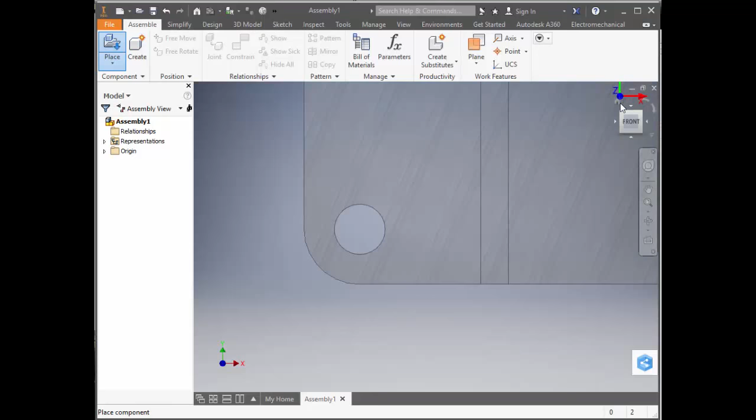Click to place the part. Unfortunately, it just plops in anywhere. Take a minute and constrain it and ground it. I like to turn on the origin planes and mate my first part on those planes to confirm proper orientation.

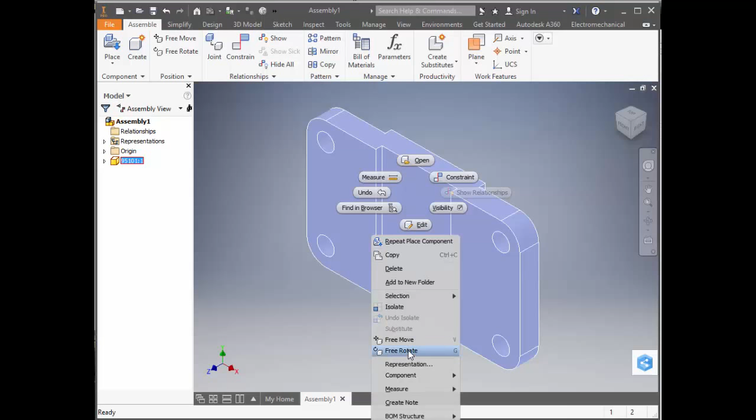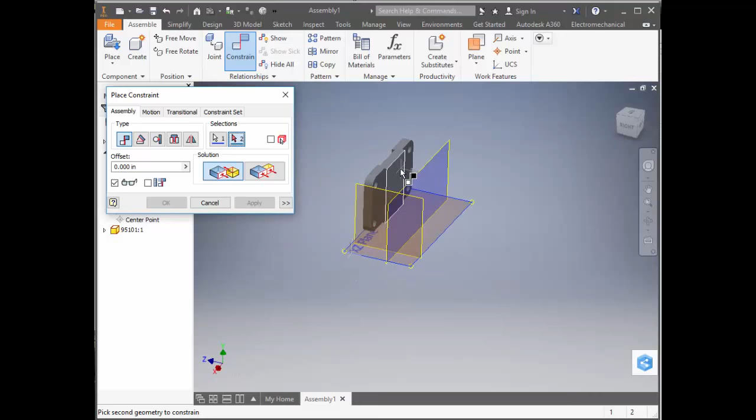Using the constrain tool, I'll select the top plane and the bottom face of the part. Click Apply to accept the mate. I'm using a 3D mouse to rotate the view. You'll have to use the view cube in the upper right corner.

Next, I use the constrain tool with the YZ plane of the assembly and the YZ plane of my first part. Again, click Apply to accept the mate.

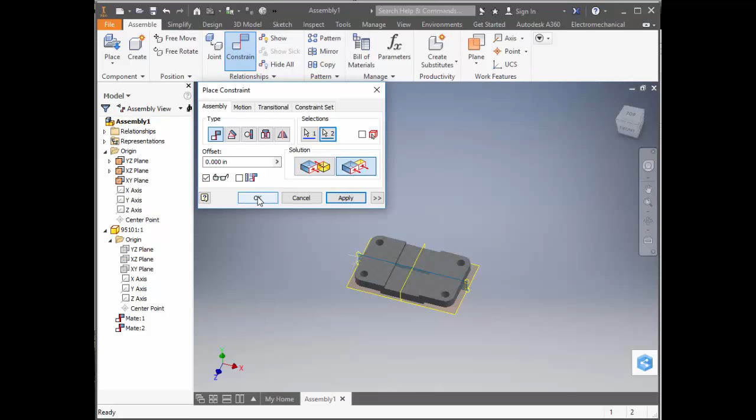To completely nail this part down, I will constrain the XZ plane of the assembly to the XZ plane of the part. Then I'll right mouse click and select Grounded.

The base cannot move at all now and is properly aligned with the world, meaning my front view will really be a front view. This is important.

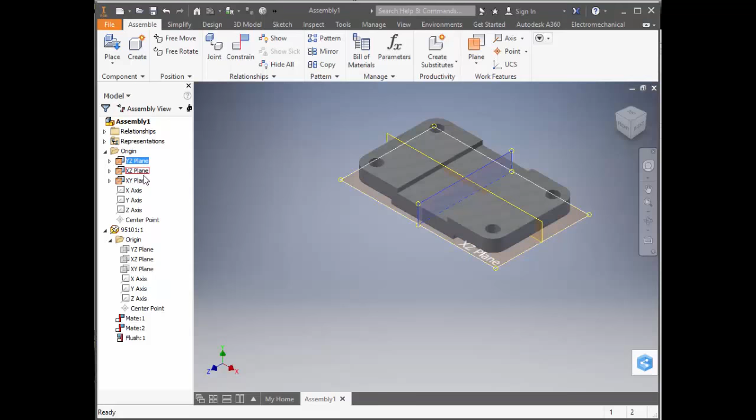Now I can place more parts into the assembly. I will add the wheel and then the end plates.

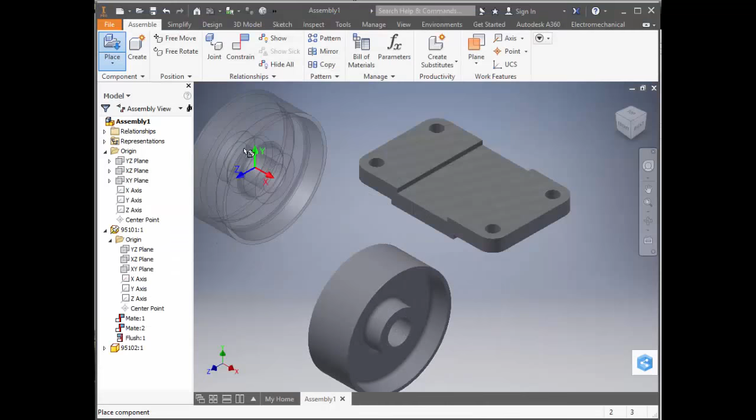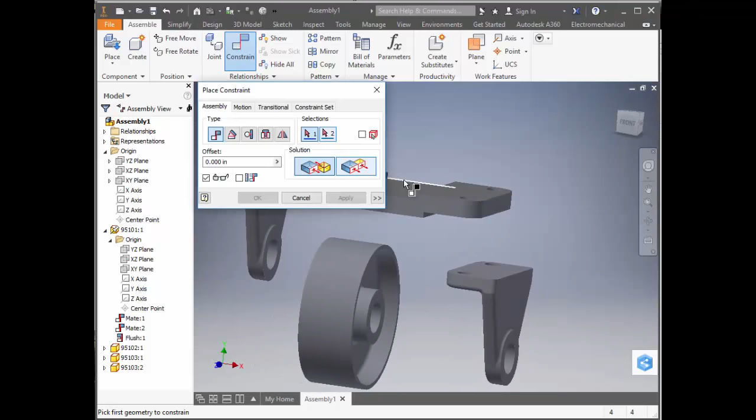Most of the constraints you will use will be face-to-face and axis-to-axis. Face-to-face places the two selected faces together.

Pick on the face of the inside of the holes to get an axis. Pick the axis for both the base and the end parts. Click Apply to accept the mate. Repeat the axis-to-axis constraint on the other hole.

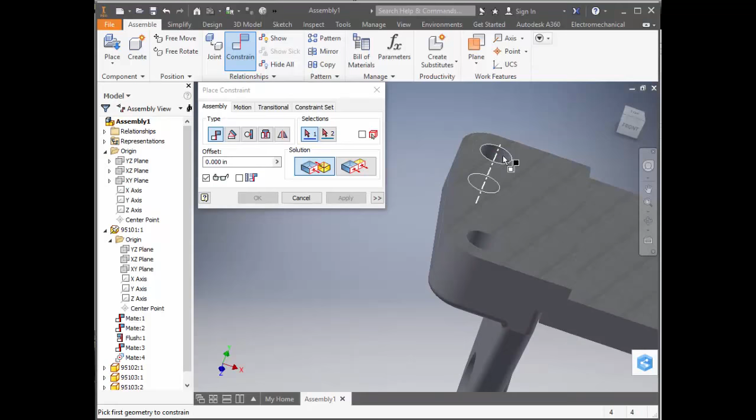Sometimes you will need to rotate the parts to be a little closer to the right direction. Right mouse click on the part and click Free Rotate. Use your mouse to rotate the part to be pretty close to what you want.

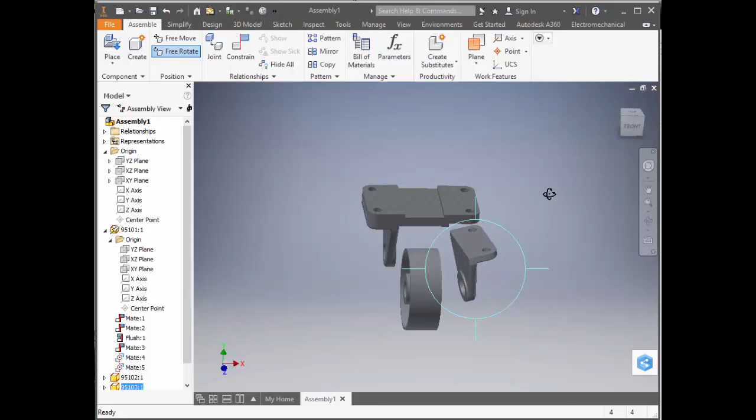Repeat the face-to-face and axis-to-axis mates we used on the other end.

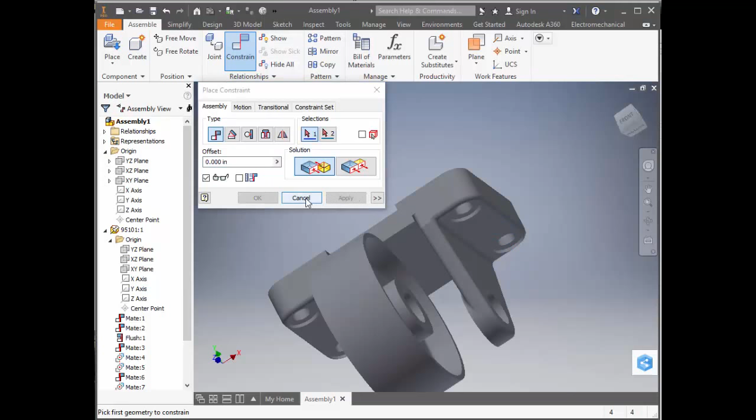Use the axis-to-axis constraint to align the wheel hole with the end plate hole. Note, you only need to do this on one side.

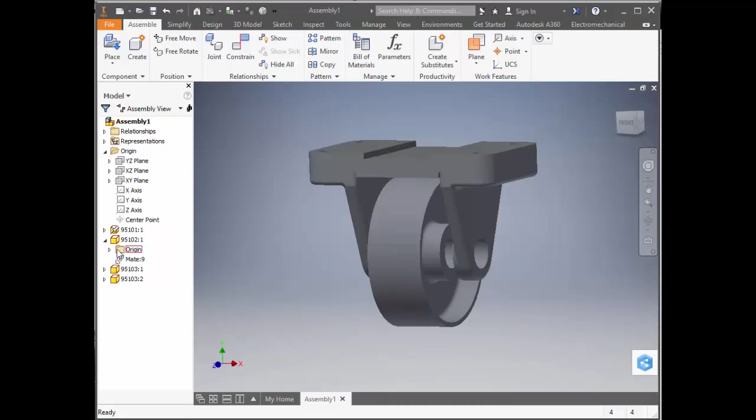There will be some clearance between these parts, so you can do the math and add offset values, but a better approach is to use the planes that already exist in the parts. That is, if you were smart when you made your part.

Add the axle with the place tool.

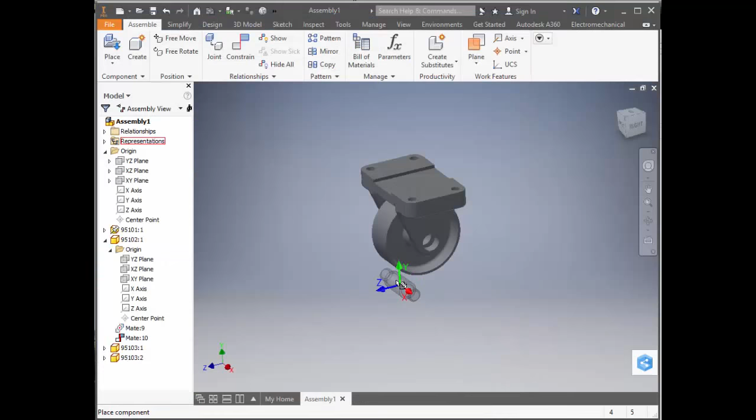Use the same axis-to-axis and plane-to-plane mates we used on the wheel to center the axle between the ends. You will soon realize why I use symmetry extrude and design my parts to keep the principal planes in the center of them.

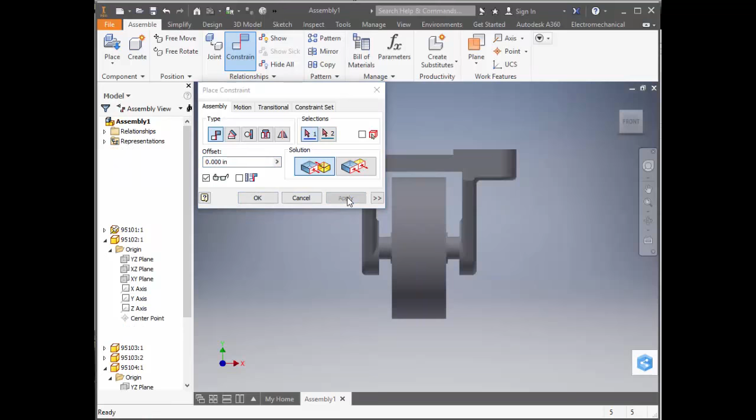Place 2 bushings into your assembly. Use the axis-to-axis and face-to-face mates to place the first bushing.

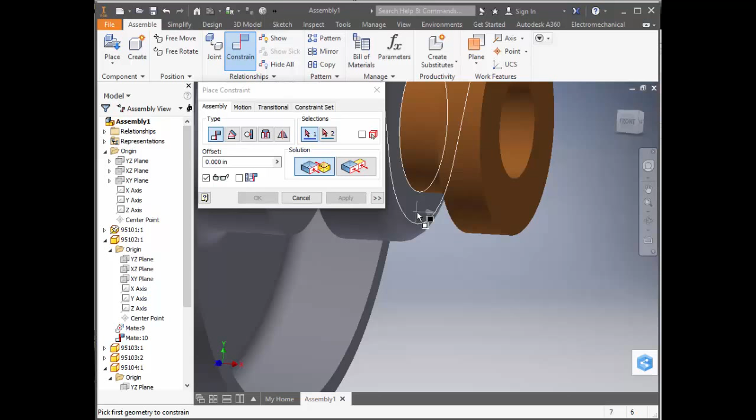We could do these 2 mates again for the other bushing, but Inventor has a special mate for this situation called insert. First, use free rotate to get the bushing somewhat oriented.

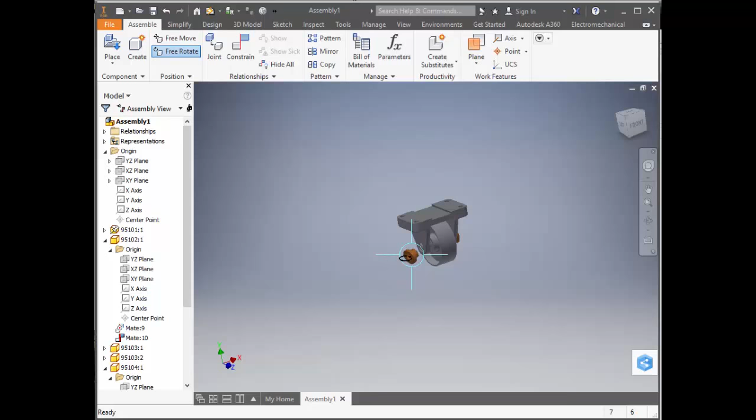Change to the insert mate type in the constraint dialog box. Pick the edge of the hole first, then select the edge of the bushing that will rest against the hole.

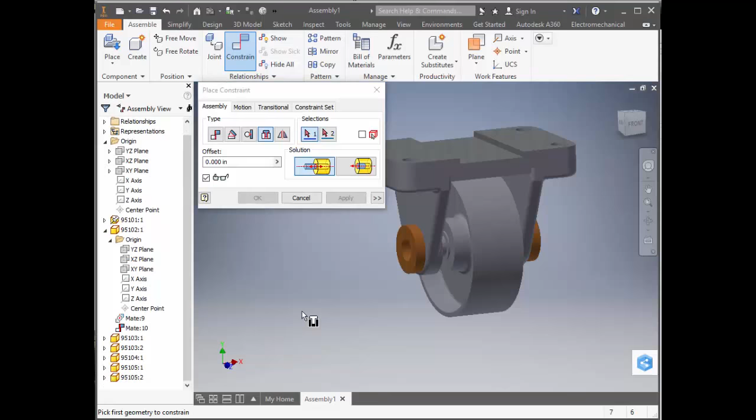Your assembly is now complete. All of the mates are listed in your model tree and can be edited at any time.

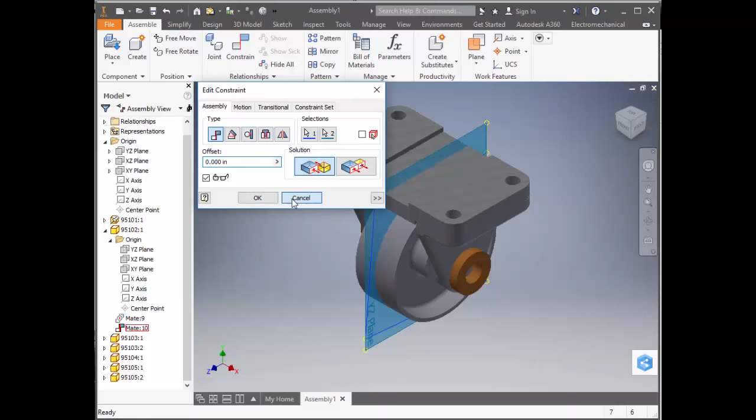There are some neat advanced tools like interference detection and contact solver that you will learn about later.

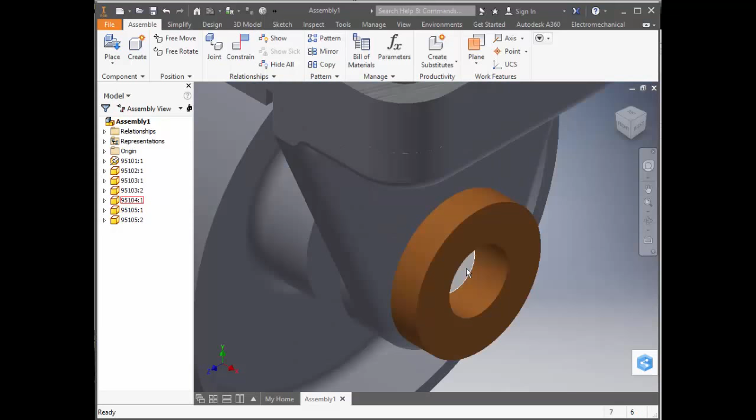Sometimes your assemblies get pretty complicated and hard to see some parts. This isolate trick is very helpful. Right mouse button and click Isolate.

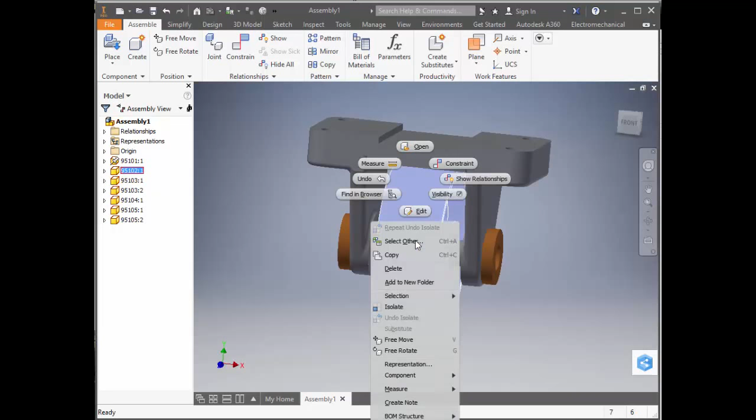You can also set a part to be transparent.

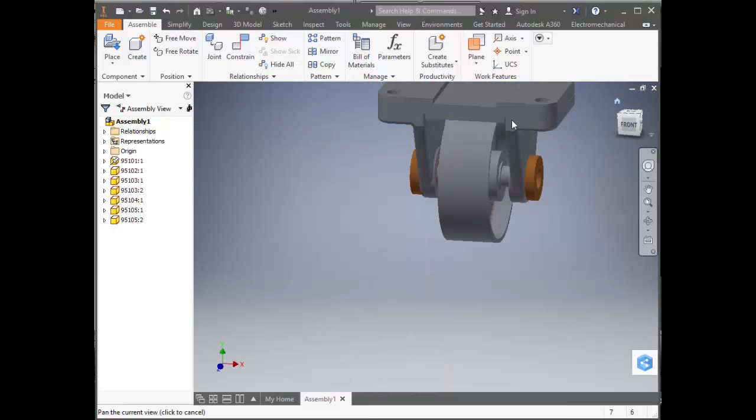The bill of material is very important. It's a good idea for you to start saving your part files with unique part numbers and adding descriptions to the iProperties of every part.